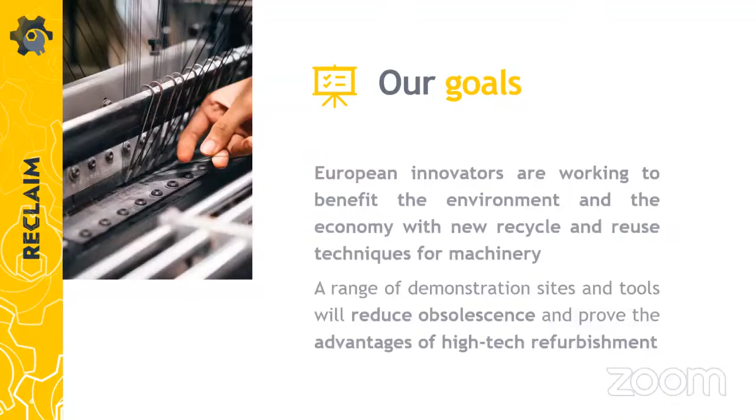So at the end, the ultimate goal of the project is promoting circular economy, which we will discuss in a bit, by reusing aging machines or machines that are near the end of their life. This has to be done by integrating high-tech and smart technologies in a platform that enables manufacturing to achieve such a goal.

This objective is essential to the industrial sector in Europe. As you may be aware, in Europe the industrial sector is very important in terms of driving sustainable growth and employment. Almost 80% of exports and 50% of employment capabilities come from the industry sector in Europe.

So accordingly, and as a consequence of that, high industrial productivity and efficiency are closely connected with well-functioning and well-maintained equipment, which clearly indicates the critical role of machinery and equipment.

In fact, it's not only Europe facing this problem, but also in the United States, the outdated machinery in use is estimated at almost 40 billion US dollars, which causes an estimated loss of about 50 billion US dollars every year due to unplanned downtime and maintenance needed resulting from online failures.

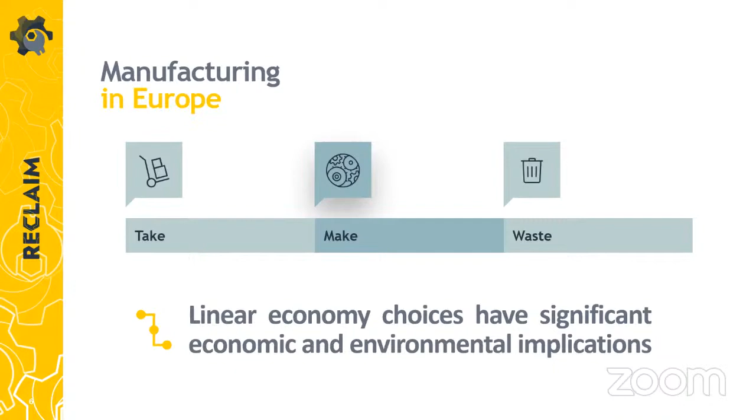So for this reason, besides increasing productivity and reducing cost, these together motivated businesses and relevant government bodies to find a balanced business model that enables closing the loop instead of generating continuous waste. And this is exactly what Reclaim is trying to achieve.

Let me explore with you in brief the Reclaim vision in more detail. Reclaim seeks to achieve 100% reuse of equipment throughout its life, through finding flexible and low-cost smart systems that support the life extension of industrial equipment.

According to that vision, the Reclaim project adopts the circular economy approach, which depends on retaining the machine in the loop as much as we can by reusing it, as an alternative or optional approach to the traditional take, make, waste model.

In this case, the circular economy approach retains resources needed, or tries to minimize the resources needed and waste emissions like CO2 emissions, and tries to minimize the energy used during the life cycle of the machine, keeping the material and equipment reused in the loop for a longer period of time. This can be achieved through long-lasting design, repair, remanufacturing, and refurbishment of the machine.

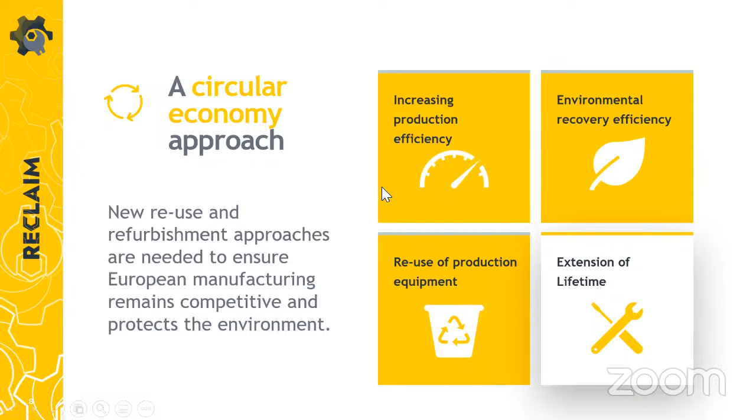So what's the solution? The solution that Reclaim is trying to achieve is adopting a new paradigm based on an integrated decision support system, or framework, that includes a collection of IoT, Internet of Things, data analytics, and health monitoring to monitor and detect the failure of machines before it happens, and also to guide the optimal course of action, such as refurbishment or remanufacturing of equipment, to increase productivity, improve lifetime, and keep costs at a constant and minimum level. This is the solution that Reclaim seeks to achieve at the end.

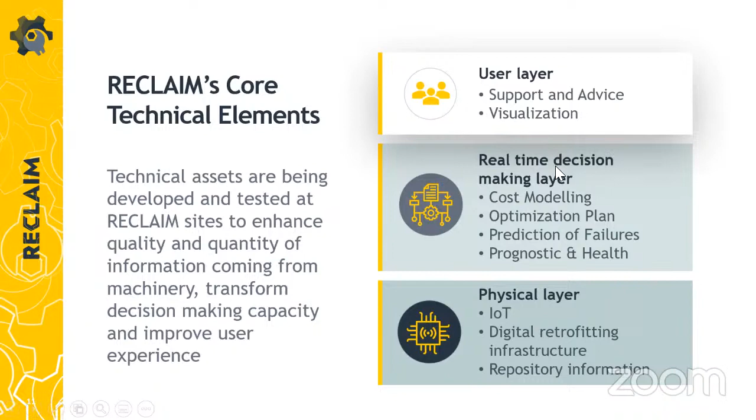So moving a bit to technical details, Reclaim solution tries to integrate three main layers. The first layer is the user layer, which includes supporting and advice visualization data and actions. The second layer includes real-time decision making, which integrates algorithmic components that enable making optimum, real-time decisions. The third layer is the physical layer, which includes all the technological equipment that helps support the decision for the equipment.

And then the core Reclaim platform, which includes a dedicated environment consisting of three main components: the decision support framework, which supports decisions through several algorithms designed for this specific task, and in-situ repair and data analytics with the refurbishment and remanufacturing frameworks.

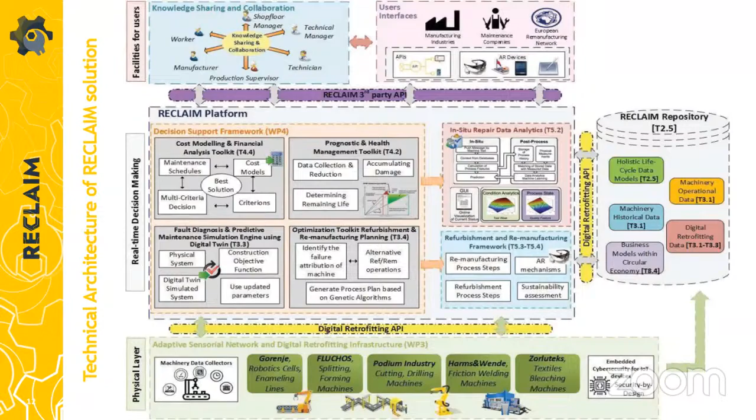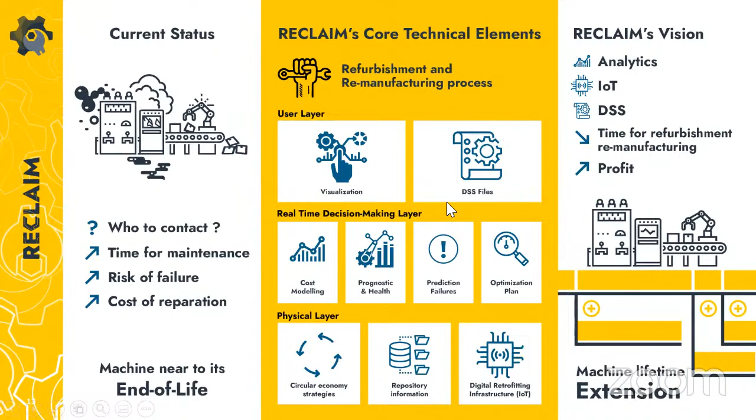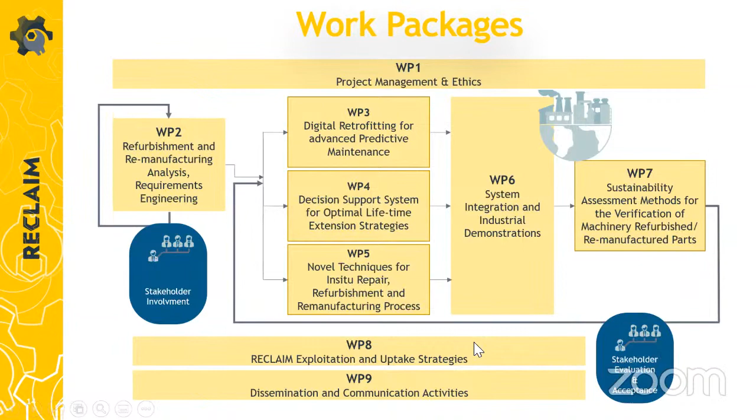So the Reclaim project, as I said, is launched by 9 European countries. We have in Reclaim 6 use cases that will be used to demonstrate the technologies and solutions produced in Reclaim, which include the refurbishment of robotic cell of dishwasher industry.

The fourth use case is the predictive maintenance and refurbishment of a wood making production line, which comes from Podium company in Switzerland. The fifth use case is the remanufacturing and predictive maintenance of friction welding machines, which comes from Harms and Wende company in Germany. And the last use case is the maintenance, refurbishment, and upgrading of bleaching machines for the textile industry, which comes from Zorluteks company in Turkey.

So let us move now to give you a quick overview of some of the tasks that we are carrying out at Aston University within the Reclaim project. In brief, Aston University in Reclaim project is considered one of the key partners participating in the project, and through the project we are focusing mainly on the research side related to methods and algorithms development.

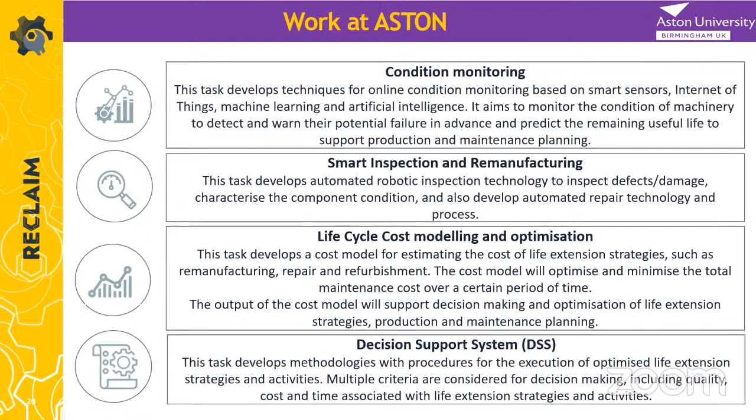So the main areas of contribution include life cycle cost modeling and optimization, condition monitoring, smart inspection, and decision support systems. Here I am going to explore some of these applications briefly, and I am not going into much detail. However, if anyone is interested in any of these applications, please feel free to contact me at any time to have further discussions about it.

So the first application that we have developed in Reclaim is the cost modeling and financial analysis toolkit. Aston has developed this toolkit service for estimating the cost of the life extension strategy that is going to be applied for Reclaim machinery, for example remanufacturing, refurbishment, and so on.

So the output of the cost model will support the decision support framework in order to choose the optimum life extension strategy, as well as the production maintenance planning. So this is the first service that Aston provided to the Reclaim project.

So this cost modeling actually depends on some other components in Reclaim and receives information such as the list of life extension strategies available, the machine profile indexes, stop production data, process data, failure types and failure probabilities. Also the outputs of the cost modeling will be integrated or will service other components such as the refurbishment and remanufacturing component, the decision support framework, and the life cycle assessment software as well.

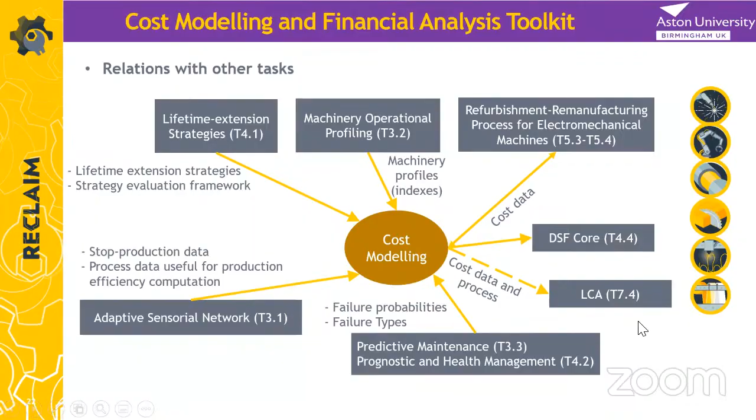So another service or algorithm that Aston University will provide Reclaim with is the cost-benefit analysis tool. For the cost-benefit analysis tool, we are developing an algorithm that will gauge the economic viability of Reclaim use cases and solutions.

And determine whether the value and benefit that will be gained from the Reclaim solution is worth the cost required to develop it. So the ultimate goal for this tool is to assess the Reclaim solutions and technologies developed, and to decide the commercialization level, and whether the tool is ready to be commercialized or needs any further improvement.

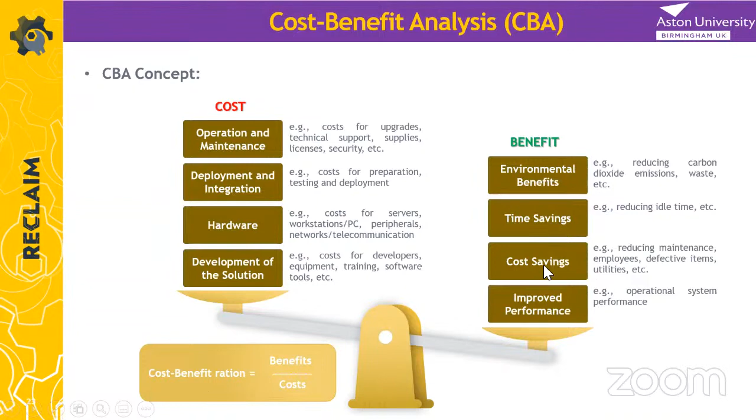So actually what we do is try to gauge the cost, comparing cost against benefits. We try to quantify the costs coming from development, hardware deployment, operational and maintenance, against the benefits gained through improving performance, cost savings, time savings, and environmental benefits. So in the end, a cost-benefit ratio will be obtained for every solution and component within Reclaim.

So as I said, all Reclaim use cases and Reclaim solutions will go through a cost-benefit analysis to assess the economic viability and its readiness for commercialization.

The other tool that Aston University is developing is the life cycle cost optimization and maintenance planning. We are carrying out this task, and this algorithmic service is designed to provide industrial manufacturers with a periodic maintenance plan.

It will include a recommendation to enable the manufacturer to get the most cost-effective maintenance and action, based on integrating sophisticated and detailed analysis of the degradation models of the machine, cost modeling, and after-repair improvement models.

All these models will be integrated within the core optimization algorithm, which uses genetic algorithms under certain model constraints to allow the user to deeply analyze the status of the machine in terms of cost and degradation profile.

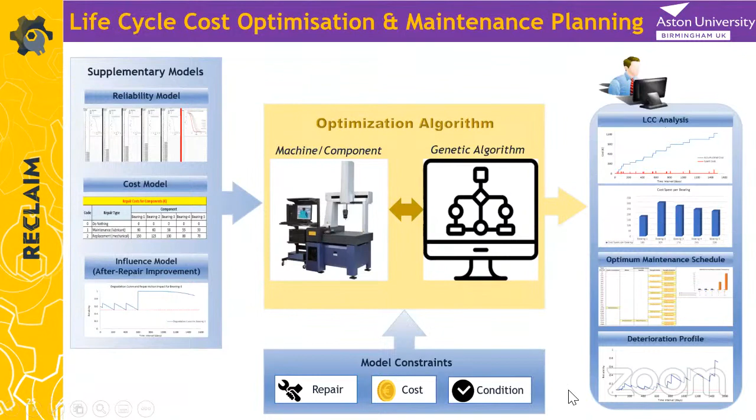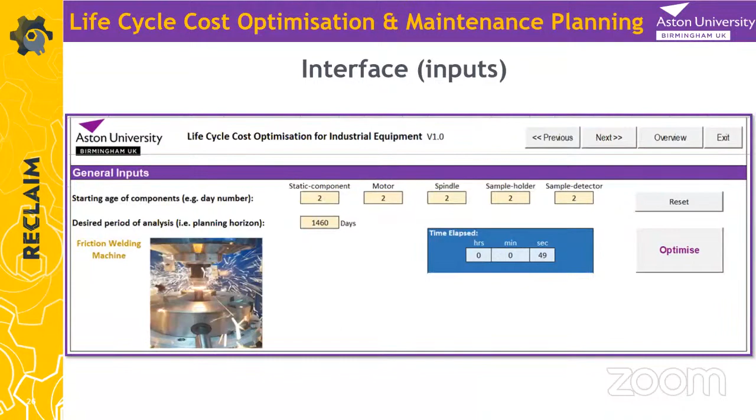This is just a very quick overview of the inputs of the first version of the tool, which include simple information like the starting age and the time period required for the analysis. The user will get a number of screens that allow them to navigate and analyze the status of their machines and components.

So we will have the summary of the outputs, the summary of the starting age and ending age, the detailed analysis of the degradation of the machine over time, the maintenance schedule over the required period of time, and detailed cost analysis.

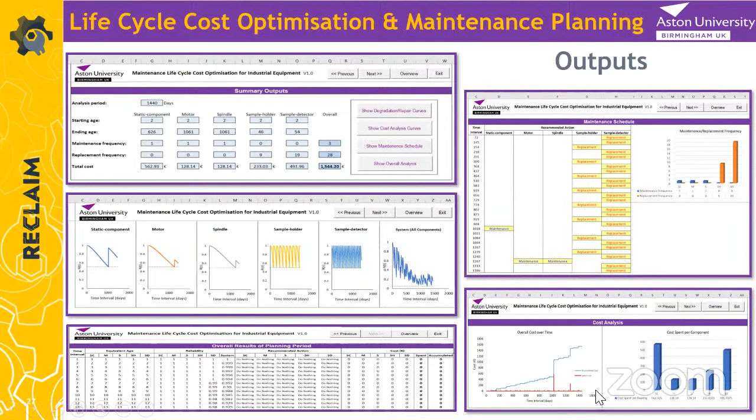Another important task that Aston University is carrying out in this project is decision-making for remanufacturing. Remanufacturing has to be made through implementing several processes such as cleaning, painting, welding, heat treatment, machining, metal spraying, and inspection. So the challenge facing manufacturers is which is the best technique to carry out certain processes in respect of quality, cost, and time.

For example, cleaning has many techniques to do it. This is just an example, but we have actually more than 15 techniques that can be used for cleaning, and the same for painting, welding, etc.

So this is a real challenge facing manufacturers: to select or choose the best combinations that optimize both cost, quality, and delivery time.

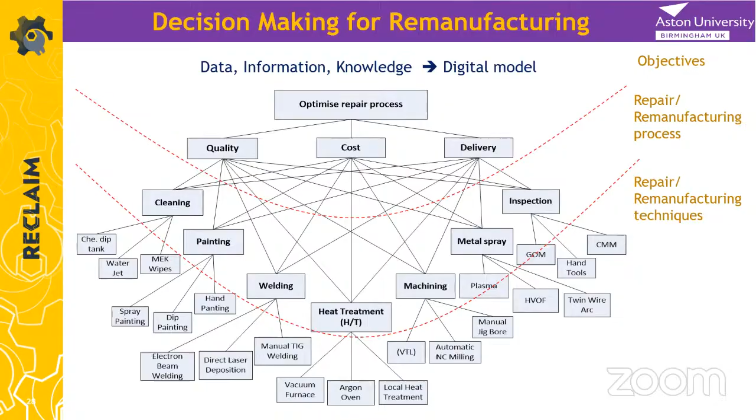So Aston University is carrying out this task, trying to develop a model based on a fuzzy synthesis approach to analyze and solve the problem of remanufacturing process selection. The preliminary model of this algorithm is already developed and also validated or implemented on a sample of components within the Reclaim project.

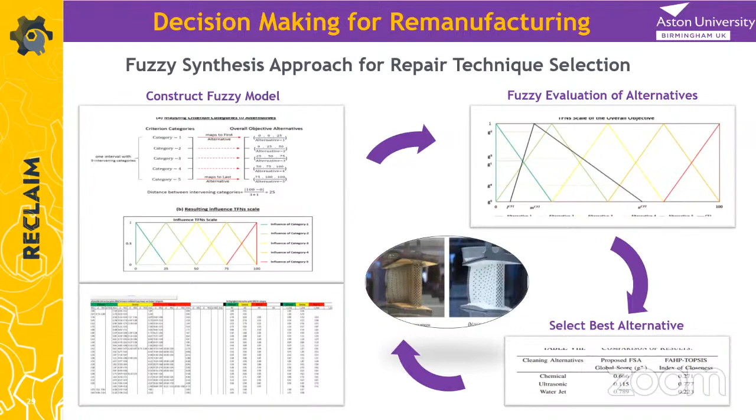We are also implementing some machine learning algorithms within the Reclaim project under the task of condition monitoring. We have also developed and implemented some algorithms for failure detection and fault diagnosis.

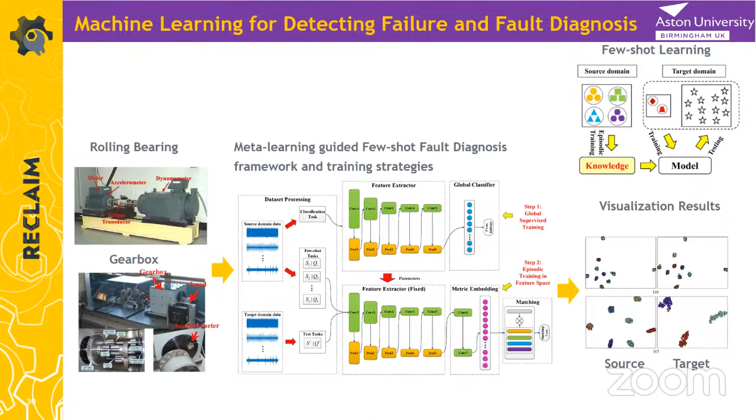An example includes this algorithm that you see on the screen, which is based on a few-shot fault diagnosis model for rolling bearing and gearbox failure detection. We also have an algorithm based on

transfer learning using guided features to deal with data with varying intervals and limited availability.

We have also proposed a digital twins framework for assessing the Reclaim project assets. Such a digital twin model helps create a replica of the planned production process, to simulate and enable engineers to identify any process failures before the project goes into production.

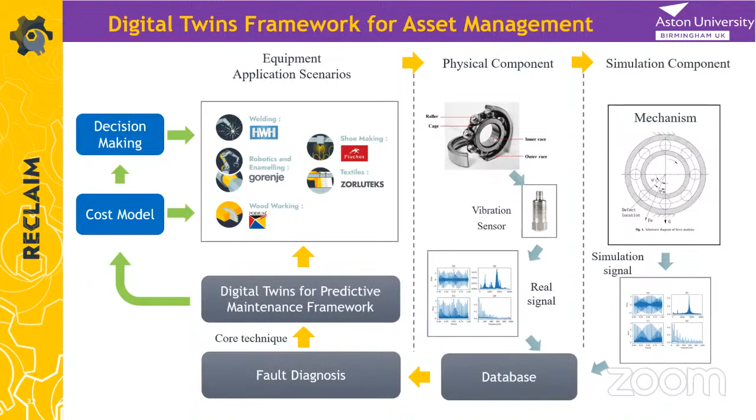So this is, in brief, the overview of what the Reclaim project is, and just an idea about what Aston does within this project. But we are happy to discuss further if anyone is interested in any of the applications that I have introduced.